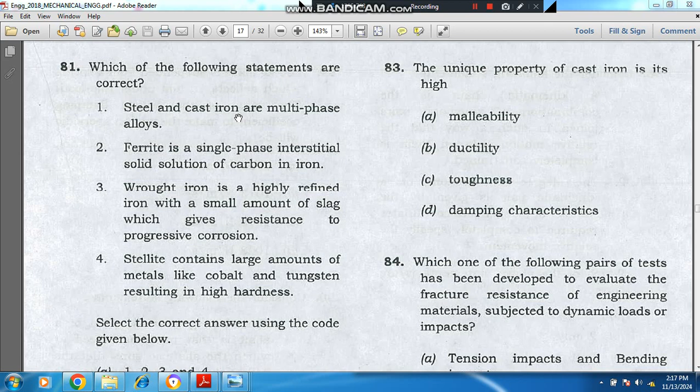Hello, welcome again. We are solving Engineering Services Exam 2018 mechanical engineering paper.

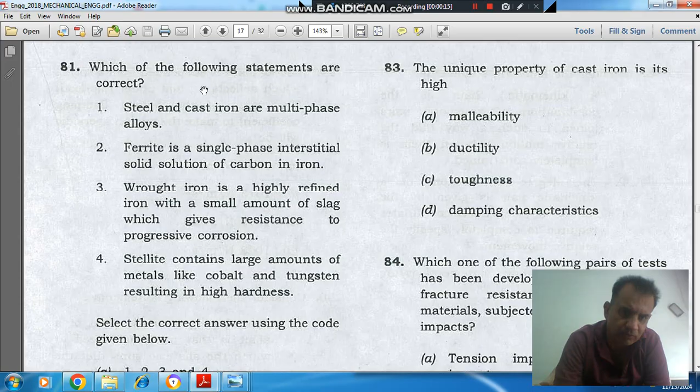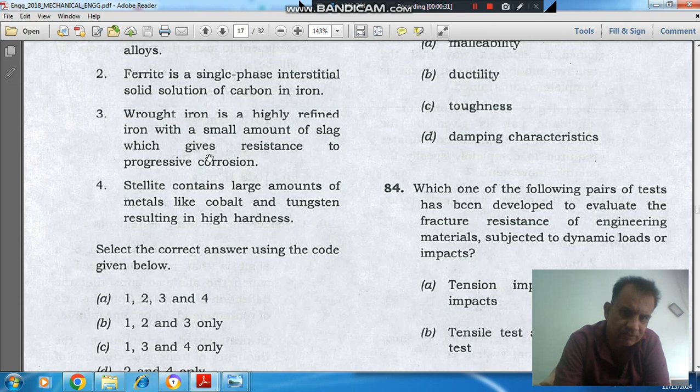Question number 81 is: which of the following statements are correct? 1. Steel and cast iron are multi-phase alloys. 2. Ferrite is a single phase interstitial solid solution of carbon in iron. 3. Wrought iron is a highly refined iron with a small amount of slag which gives resistance to progressive corrosion.

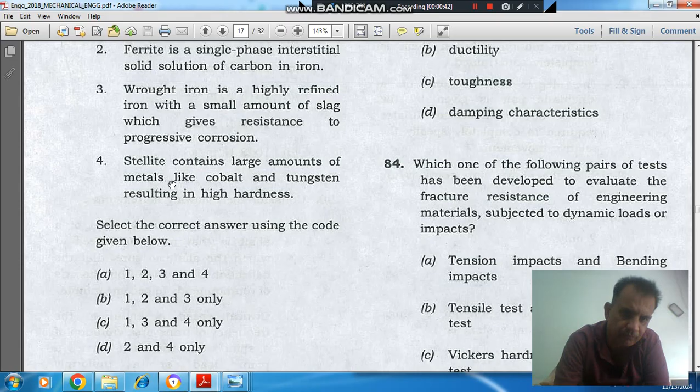4. Stellite contains large amount of metals like cobalt and tungsten resulting in high hardness. Select the correct answer using the code given below. Option A 1, 2, 3 and 4. Option B 1, 2 and 3 only. Option C 1, 3 and 4 only, and option D 2 and 4 only.

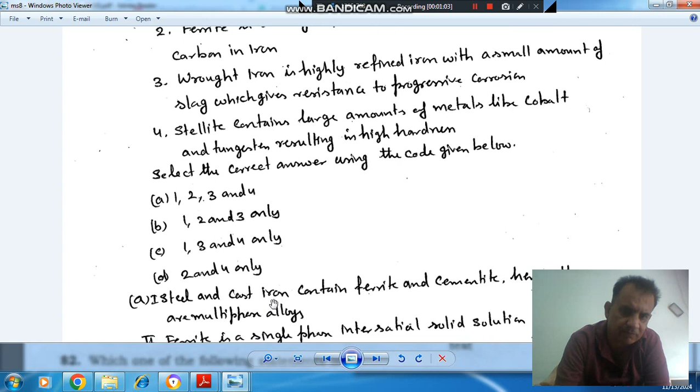Here the first statement is about steel and cast iron. Steel and cast iron contain ferrite and cementite, so they are multi-phase alloys, and the composition of ferrite and cementite is different for different types of cast iron and steel, so these are multi-phase alloys.

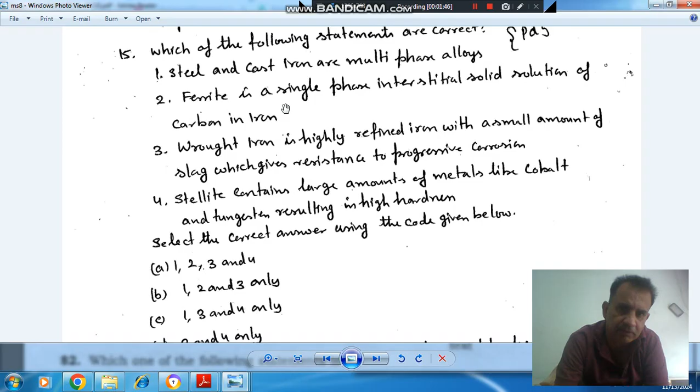And the second statement is ferrite is a single phase interstitial solid solution of carbon in iron. Ferrite can contain a maximum carbon of 0.025%. So that is your single phase. Ferrite can be considered single phase, but ferrite and cementite together are two phase or multi-phase. So the second statement, ferrite is a single phase interstitial solution of carbon in iron, is correct. Third statement is about wrought iron.

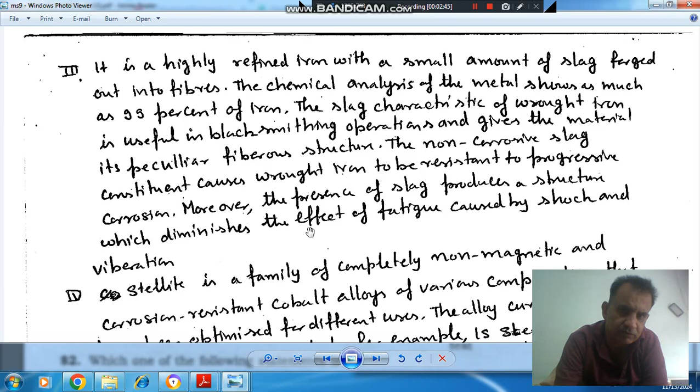The non-corrosive slag constituent causes wrought iron to be resistant to progressive corrosion. Moreover, the presence of slag produces a structure which diminishes the effect of fatigue caused by shock and vibration. So the third statement, that wrought iron is a highly refined iron with small amount of slag which gives resistance to progressive corrosion, is correct.

The fourth statement is about stellite. About stellite, I am reading out some theory. Stellite is a family of completely non-magnetic and corrosion-resistant cobalt alloys of various compositions that have been optimized for different uses. The alloy currently most suited for cutting tools is, for example, Stellite 100, because this alloy is quite hard, maintains a good cutting edge at high temperature and resists annealing.

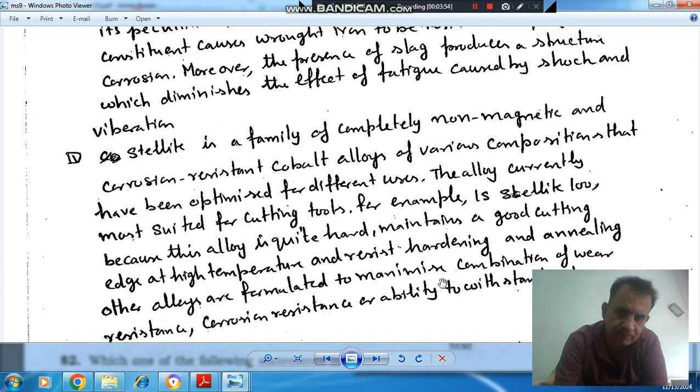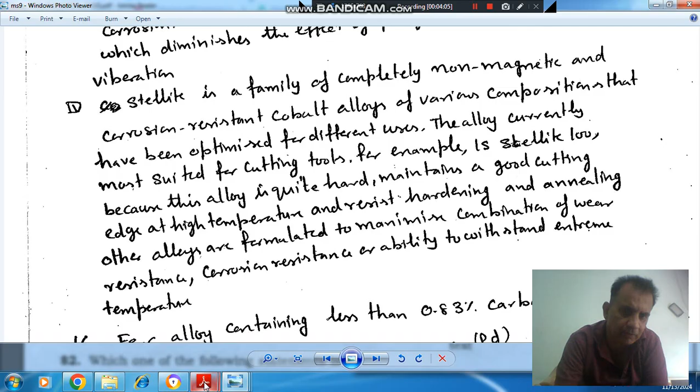And other alloys are formulated to maximize the combination of wear resistance, corrosion resistance, and ability to withstand extreme temperatures. So stellite is an alloy of cobalt and tungsten, providing it high resistance to corrosion, wear and temperature. So all statements are correct.

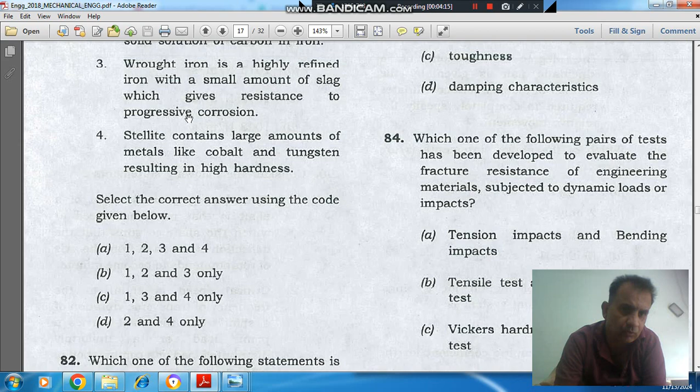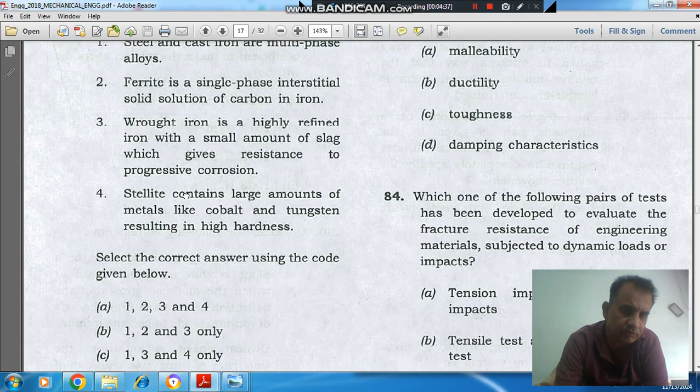Steel and cast iron are multi-phase alloys, that is correct. Ferrite is a single phase interstitial solution of carbon in iron, that is also correct. Third, wrought iron is a highly refined iron with small amount of slag which gives resistance to progressive corrosion, that is also correct. Stellite contains large amount of metals like cobalt and tungsten resulting in high hardness, that is also correct. Answer is option A.